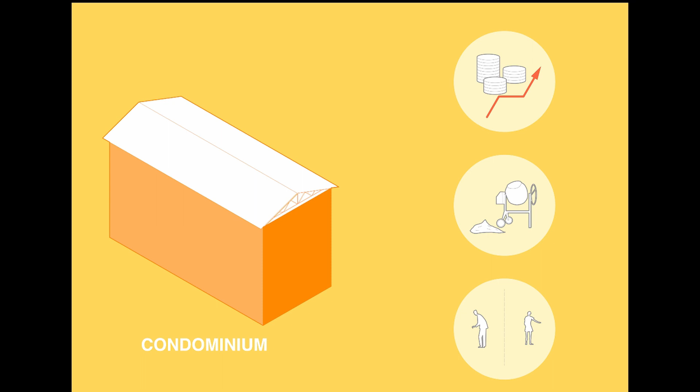Thus, the Ethiopian government promoted a full-scale project, the condominium blocks. The housing project faces the matter of density and provides a fast construction process, but three main problems can be highlighted: high production cost, import of foreign technologies, and building configuration that does not match with the social context. So, how can the different socio-spatial layers that characterize the fabric of the Awade neighborhood be reinterpreted into a low-rise project able to reach the same density of the condominium blocks? How can the project be feasible and promote itself as a flexible, standardized system whilst maintaining low costs? Let's look more into this.

Fasil and Ayana are an Ethiopian family based in the Awade district of Addis Abeba. They've been living together with their 6 children in a one-room house for the past years. With the lack of facilities and space, and with a new child on the way, the couple is looking for a solution, but money is tight, and so is the space in the area. As they want to stay close to their families and friends, there are few possibilities. They have seen a recent project that has been built next to their house. Neighbors and friends that were involved in the building process say it is a prototype that was developed in Germany at the Technical University of Berlin.

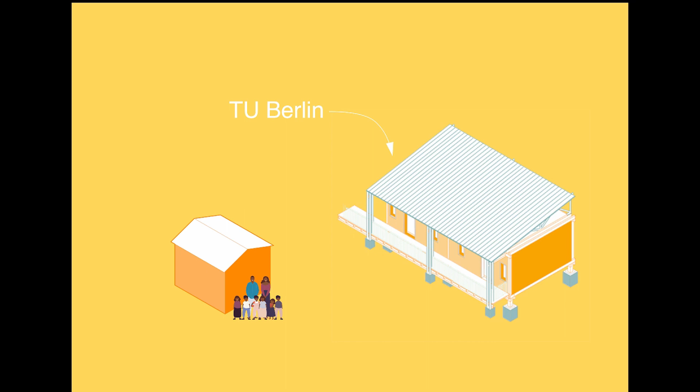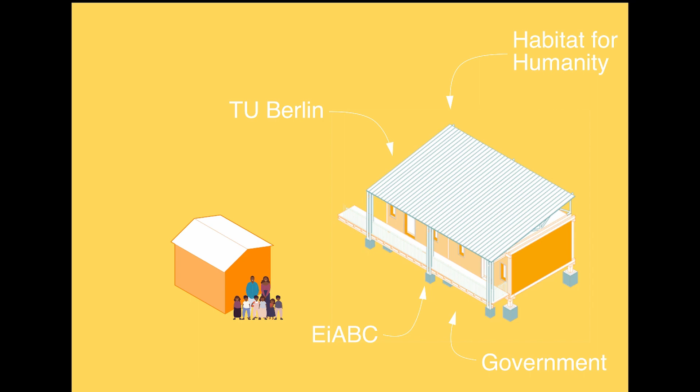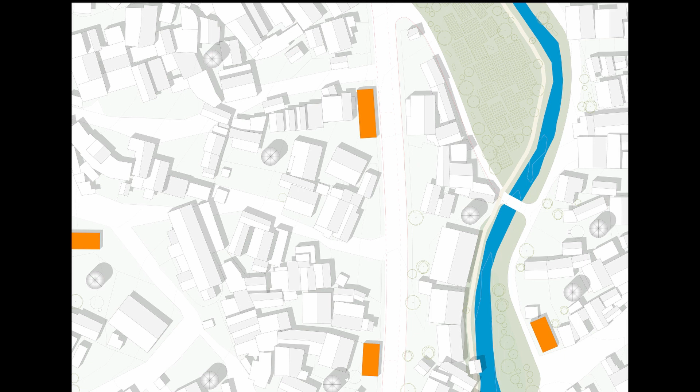Those involved were architecture students working together with architects and structural engineers, in cooperation with the Ethiopian Institute of Architecture and the non-governmental organization Habitat for Humanity, who are helping raise money and organizing the rehabilitation. Moreover, in the last months, many new water towers, biogas plants, recycling and power hubs have been installed around the neighborhood. The NGO is looking for people from the community that are in need of a job and want to get involved and help with building and developing the area. It's a great opportunity for the locals to learn new skills, contribute to their community and earn money. But what does this all mean? The couple decides to look into it.

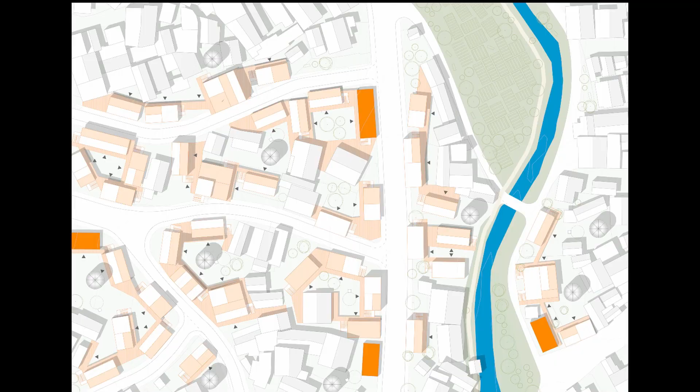A cheap, easy to build and flexible project with complete off-grid facilities. The prototype should be built in the entire Awade district. The current situation in the area is shaped by narrow streets, fences and lack of public space. Thus, daily life runs on the street and many locals have small shops and temporary sales units alongside the roads. The situation in the compounds is even tighter. With activities like washing, drying clothes and cooking happening there, the space for this is even more limited. Every prototype is independent, allowing the entire project to be built in phases, to develop through time and organically integrate into the surrounding physical structures. This avoids disruptive spatial and social breaks between old and new structures and communities.

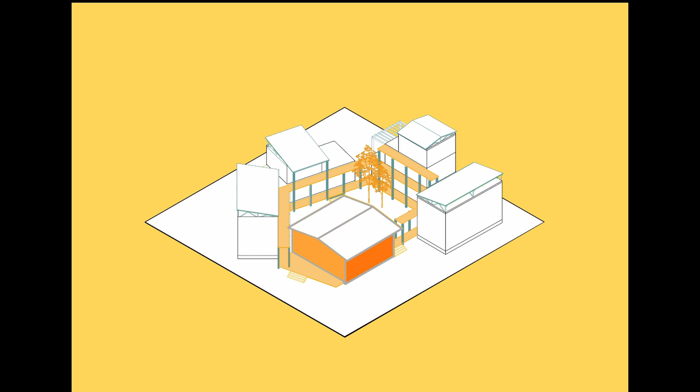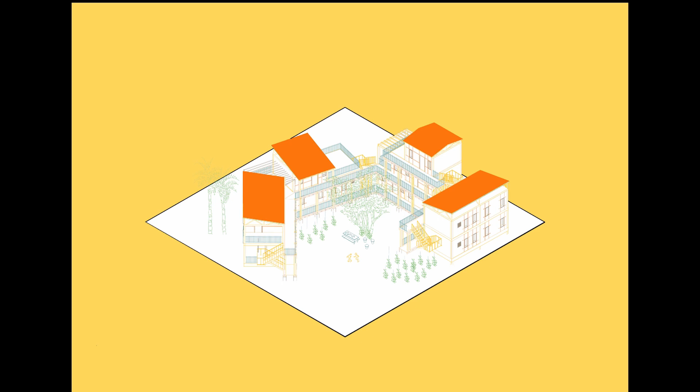As the socio-spatial layers are affected by the density, the proposed development shows a big increase in densification, while platforms and bridges enact a holistic strategy of multiple scales, from the main urban streets to the intimacy of the compound and eventually to the most private space of the dwelling, multiplying the courtyard idea and connecting the existing buildings with the new project. The created courtyards are giving space for playgrounds, gathering areas, markets, gardening, infrastructure and all other communal activities. The backbone of the project is the idea of a residential compound, a physical and social structure composed of two elements: an incremental housing block with a maximum of 3 floors, and an elevated ground floor and circulation system using local construction materials.

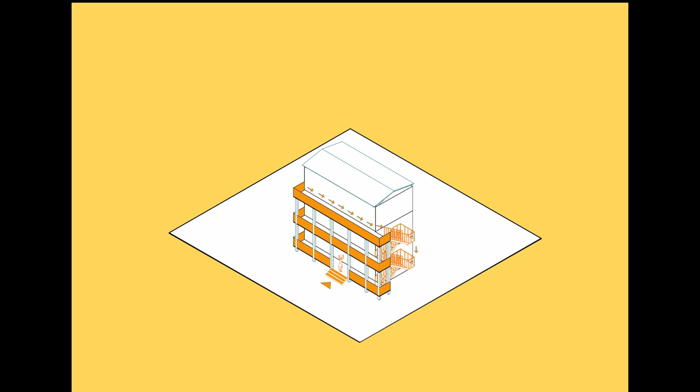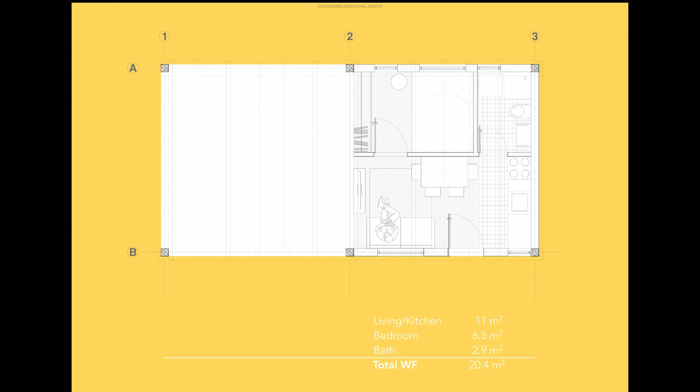The project allows a variety of floor plan alternatives for the ground and upper floors, showcasing the commercial and rentable use of space in the ground floors by creating possibilities for the users to create their own business in their house, while the upper floors are entirely for living purpose. The average apartment size is between 21 and 42 square meters, allowing an average of 1 to 9 people to live and work there. Facades and roofs are customizable and give space for individuality.

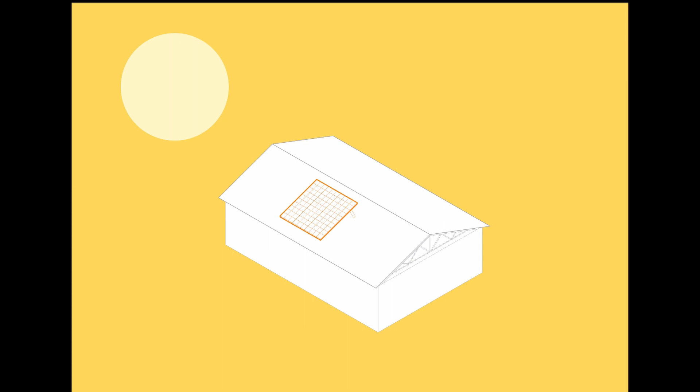The off-grid infrastructure allows the users to be independent, without reliance on one or more public utilities, creating a cheap alternative to it. PV panels fixed on the roofs allow for energy from the sun to be converted into electrical energy, while rainwater is funneled from the roof of the building to underground water tanks where the water is stored until needed. Further water supplies can be taken from the water towers in the area.

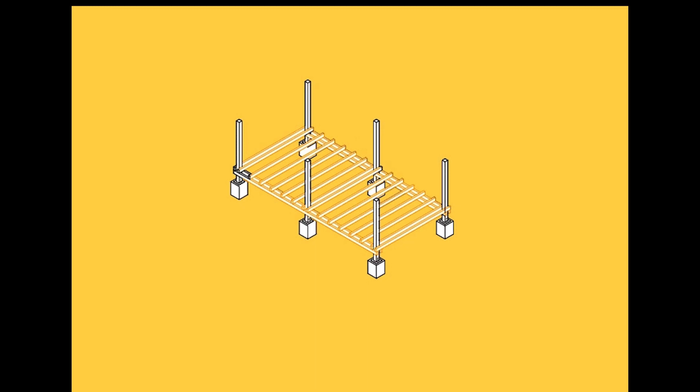So, knowing all the facts about the project, Fasil and Ayana are now put in touch with the specialists hired by the NGO to receive information about the construction details. The hired specialists will not only inform them about the structure, but also teach them how to build it themselves together with their community. Of course, they will always be there in case of questions or problems.

The project can be built using 2 different construction methods that offer more affordable solutions than those currently used in the governmental housing program. The project could be standardized and rapidly built using a wood structure. Alternatively, it can be built using a bamboo structure. Both involve the community in the building process. The former requires material importation, while the latter is more affordable and sustainable, using material that can be found on bamboo farms in Ethiopia. The country holds 7% of the world's bamboo resources.

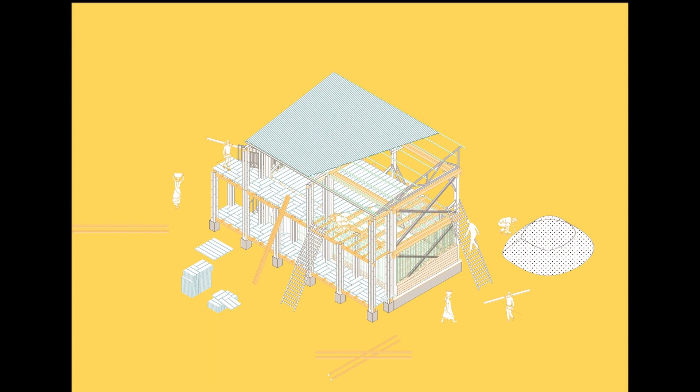The construction for the prototype is a timber structure with a measure of 4.8 by 9.6 meters and a height of 3 meters. Connections are easy between beams and columns and are made with bolts and screws. The secondary beams lie on the main beams and are attached with brackets. For an additional floor, the connection between the columns is assured by a square spigot. A square is made on the head of one of the pieces of wood. In the other wood, a square tenon will be cut that corresponds to the mortise of the other piece of wood. This splice is used in pieces subjected to compression efforts, also giving good results against torsion efforts.

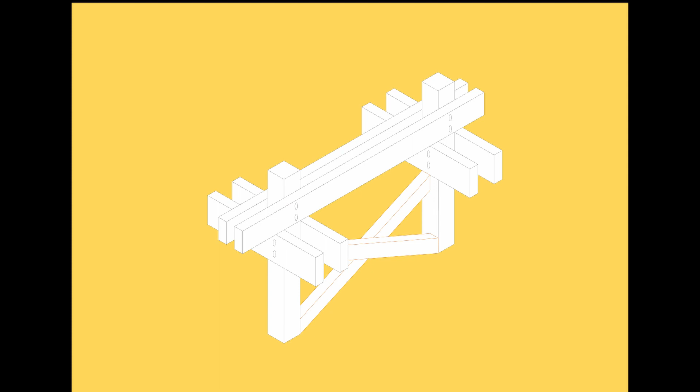The columns are designed as pendulum support and embed into individual stone fundaments. Each column has its own load transfer and different reactions to the topographical situations. The stone is extracted close to the capital of Ethiopia. As it doesn't require any special treatment, the material is stored in a material bank and afterwards transported to the site by cars or trucks. To ensure a stable construction and to avoid it from flying away, the stiffness of the structure is made by wind bracing on the small side of the structure, while the long side is reinforced with headbands.

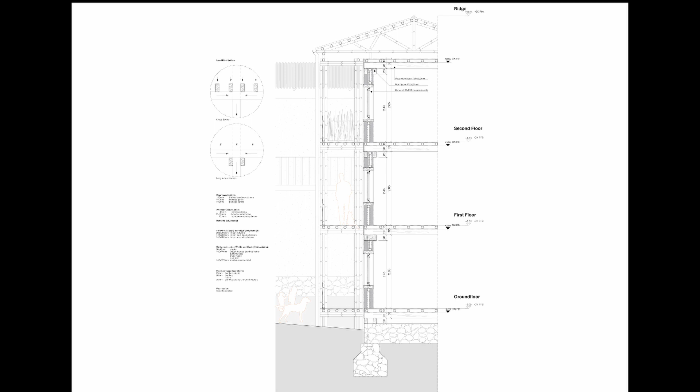The walls of the building are filled with wattle and daub, a traditional building process commonly used in informal housing in Ethiopia. The finishing can be made with either plaster or bamboo. The floor construction is made with bamboo planks, laid parallel like floorboards. These planks are placed loosely on the bamboo substructure. Contrary to the current informal building, the iron sheets will be replaced with bamboo for the covering of the roofs, and will be fixed on a lightweight bamboo structure that is easy to be dismantled when a new floor needs to be added. The verandas are made of a separate bamboo structure and easy to expand.

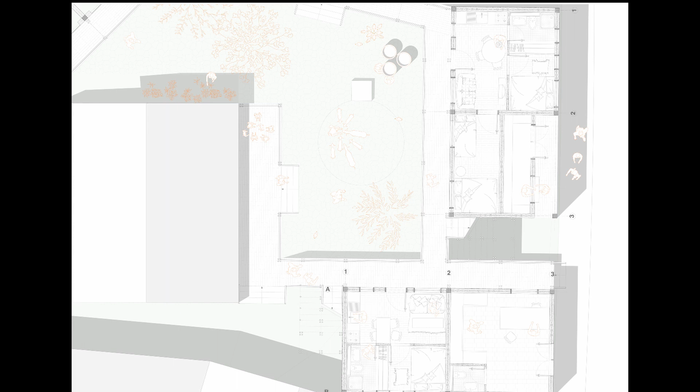The NGO is offering them to build a new floor on top of the existing prototype close to their house. This way, they are close to the construction site and can move in easily, but also split the lease cost with the family on the ground floor. As the land is state-owned, but the desire to densify and give people a better lifestyle is high for the government, the land is being leased for new projects. People will pay a monthly lease and can build state-approved projects like the prototype on it.

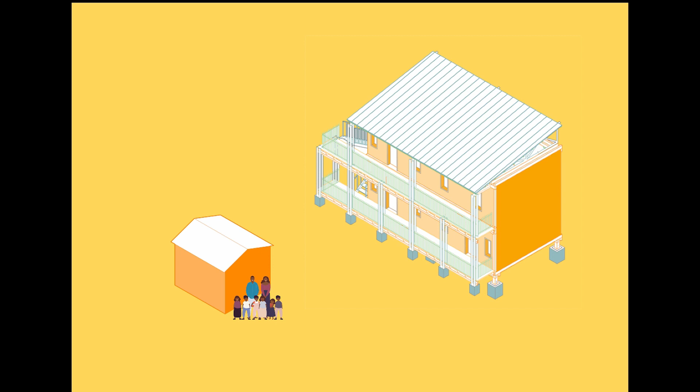The construction is supervised by the specialist and part of the architectural team. In no time, the new house is finished and the family moves into more space. The old house is redeemed by the government and demolished for further project space. The materials of the building are either recycled or stored in the local district deposit for further use. So, why not do like Fasil and Ayana and start now?